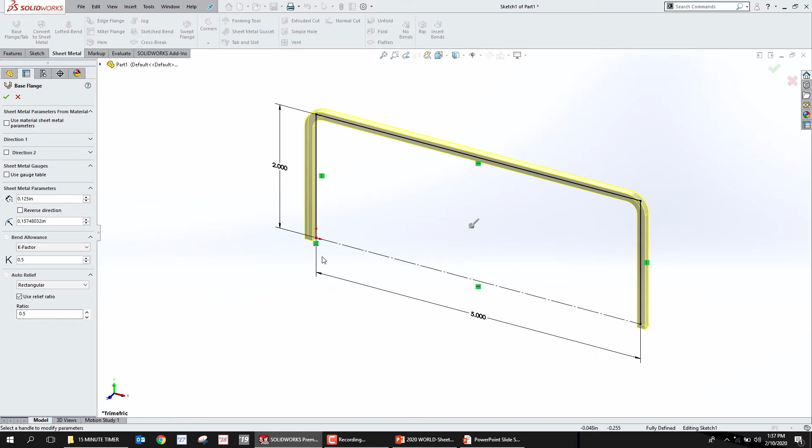Well, the miter flange is a sweep. So imagine we were going to take a sweep and create one that goes up here like this, around like this, and then down like this. So where is the sweep profile going to be? The sweep profile is going to be right here. Let's say we're going to create a sweep profile that looks like that. Can everybody see that in the back? You guys all see it?

So now we need to create a plane at that location, right? So what I'm going to do is select this edge for the miter flange. I'm going to start the miter flange command, and then click on this edge. Now, where I click it, if I click it at this region, or if I click it in this region, matters. I'm going to click it in this region.

So Solidworks automatically creates a new plane normal to that edge at the endpoint and puts me into sketch mode on that plane. Now I'm going to begin sketching and create the miter flange, which we'll talk about a little bit more when we get into the class about this idea of miter flange.

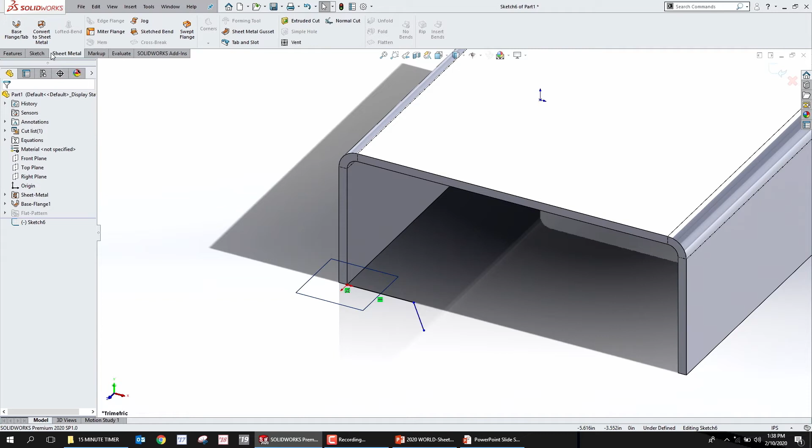This is like the pre-game warm-up, okay? If you guys are walking in, you haven't missed anything. Jose, what's up, how you doing? Welcome, haven't missed anything, we're just getting warmed up here.

But you can see here that I can go into miter flange and I can rip that miter flange around, right? It's pretty cool.

So this got me thinking when I first went through this process, does that work everywhere in SolidWorks? Like, for example, if I had a boss extrusion and I wanted to begin a new sketch normal to an edge at an endpoint. So let's say this boss extrusion has some draft on it, drafted out 6 degrees, and now I want to create a new plane normal to this edge at an endpoint.

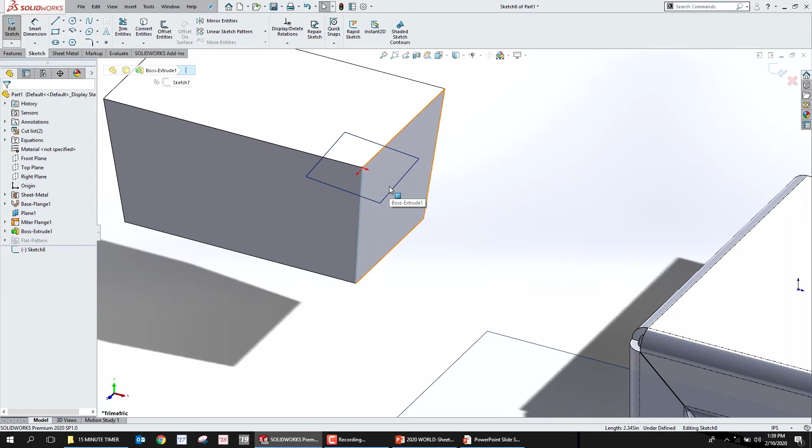I can click on this edge, go to Sketch, and click the Sketch command, and it actually creates a new plane normal to that edge at the endpoint. Kind of cool, right, that it happens like that when you're in solid mode and picking on a solid edge, but not actually that practical. It doesn't come up that often.

But what does come up quite often is the ability to do that off of a curve. So if you have a helix spiral, or a composite curve where you've joined multiple curves together, you can pick this curve here and then pick reference geometry plane, and it will create a new plane normal to that curve at the endpoint.

I don't know why I didn't do it, because I'm doing it live, right? Curve. Nope, reference geometry plane, and it'll do it. It will do it, yeah, normal to that endpoint.

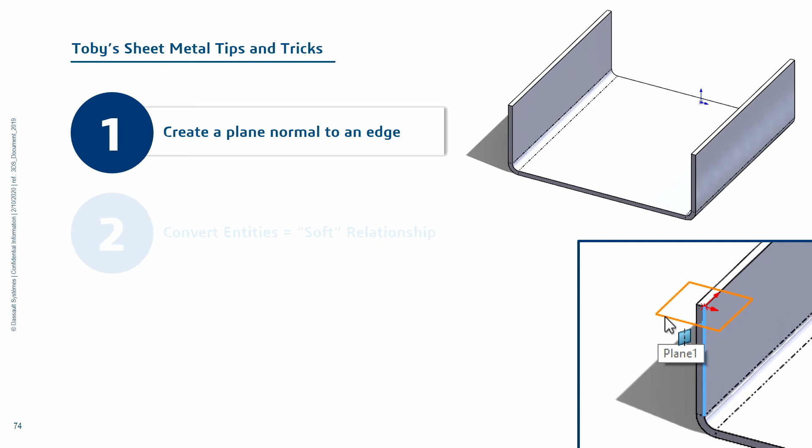So there are some other spots where you can use that, and this was kind of a quick session that I was going to originally include, and then I decided not to include it because I wasn't sure we were going to have enough time. But thanks to this awesome live crew, they gave us this extra little bit of time, so now we get to show you these extra little tips.

Now, although that one's kind of cool, but not that amazing, this one is totally amazing, and it's one that has helped me so much. I use this all the time whenever I am working in SolidWorks.

So convert entities creates a soft relationship. Show of hands, does anybody know what I mean by that? Maybe you've never heard that term, but do you know kind of what I mean by that? Nate, one other person back there? Okay, so like 3 people, now there's more hands going up. Everybody wants to join now that you did it. It just took one person.

So what this soft relationship idea means is that when you're working with the convert entities command... first of all, let's talk about the edge flange. I'm going to click edge flange here, sheet metal, edge flange. And what we get with the edge flange command is a new flange that exists along this entire edge, and we can get in here and edit this flange profile.

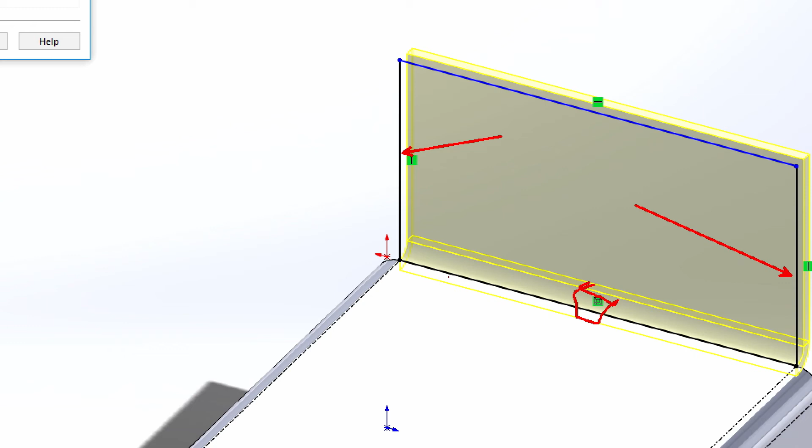It's a sketch, and you'll notice that this end of the sketch here is black, and this end of the sketch here is black. And that's because this relationship here is a convert entities relationship. So this lower edge of this rectangle has been converted off of the existing edge of the model.

But when we're in edge flange, we can just grab this line and move it over. How is that possible if it was black? If it's black, doesn't that mean it's constrained, right? And you shouldn't be able to just grab it and move it like that.

This is the only place I've seen in SolidWorks where this kind of sticky relationship, or soft relationship, exists. And it comes in the form of convert entities.

And you can demonstrate this, and see it really well, if you just make a couple of circles and extrude them. So you can see that I've got a circle here that's horizontal to the origin, a circle here that's horizontal to the origin, and I'm going to say extrude. Then I'm going to go to the front plane and pick this edge here, and say convert entities.

And I'll pick this edge here, and say convert entities as well. Just to make sure that sketch is a little easier to see, I'm going to go into sketch color and say I want that to be red.

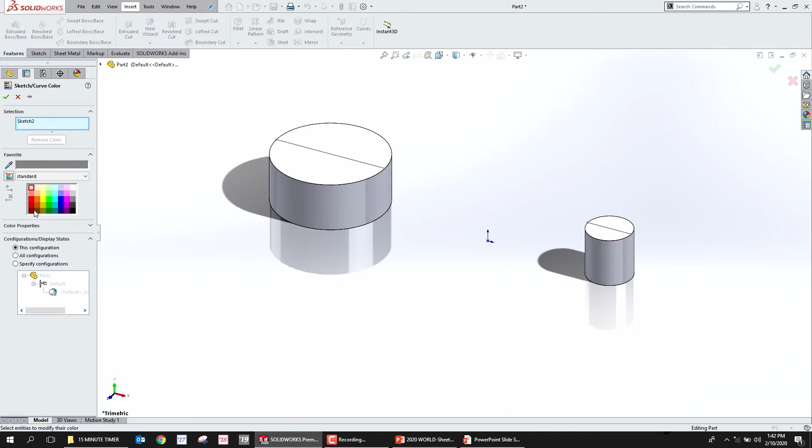So now I'm going to edit this sketch of the circles, and make this circle smaller and this circle larger. What's going to happen to those lines? They're going to move, as expected, right? But this is a convert entities command, so the endpoint of this line has this kind of soft relationship.

So I can actually grab this endpoint and just move it over, and now it's no longer going to stick to that convert relationship. Now, I've never seen this anywhere else in SolidWorks. I don't know if you guys have, feel free to yell out. But I've never seen this kind of thing, I call it like a sticky relationship or a soft relationship.

And I only learned about it because of sheet metal. I was going through sheet metal and I was like, hey, how come edge flange, how come the sketch is all black, it's fully constrained, but it can still be moved? You can still grab the edge flange and move it over, make it smaller, make it larger. And I learned that that kind of soft relationship exists all throughout convert entities.

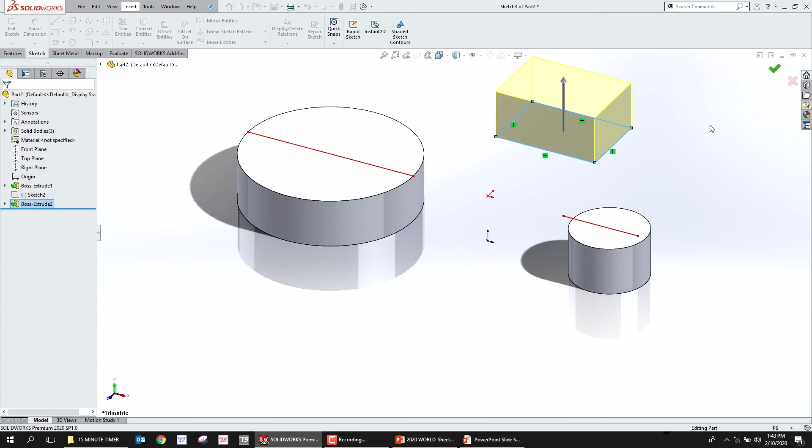So a practical application of that might be something like you are going to create a new rectangular boss extrusion, and then you just want to cut a notch into a corner of that. So you do sketch, convert entities, so now the whole thing is converted. And now I'm going to delete this convert entities relation because this is kind of collinear. So I'm going to delete that one, but the line is still black. But I can just take this now and move it over. And now the line's blue. And now I can just add a dimension, make that a little bit smaller.

So even though it shows up as black, sometimes you actually still can grab that geometry and move it. It's still predictable, which I'm sure you all remember from the song. Fully defined means that it is predictable, which is what we want. But it's got this kind of soft relationship, so you can turn it into underdefined.

Cool? Any questions? So far, so good? We're good? Pat? Right? All right. Everything sounds good, he's giving me the thumbs up. So I think we're good to go here.

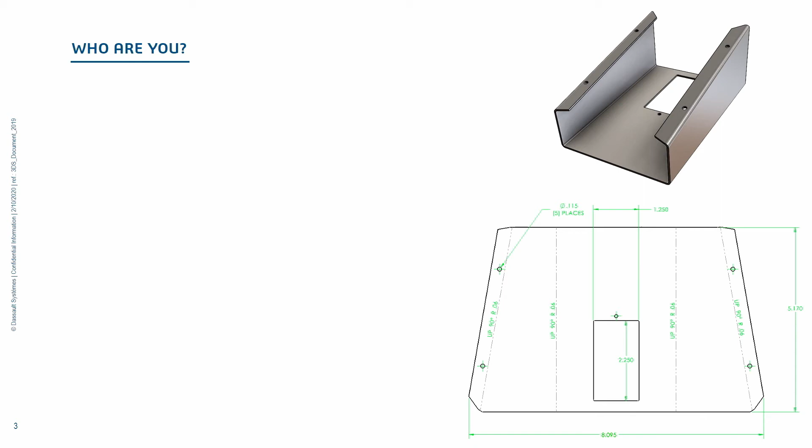So let me find out a little bit about who you are. So how many people in the room are newbies? Maybe you're just getting started with SolidWorks, maybe you're just getting started with sheet metal, maybe you really haven't done too much, feel a little lost. Okay, good, awesome. You guys are in the right place, welcome.

How many people would consider themselves kind of intermediates when it comes to sheet metal? So you may work with sheet metal for a few years, but you're trying to learn a little bit more of the ins and outs of what's going on in the world of sheet metal. Okay, great. So you guys are in the right spot as well.

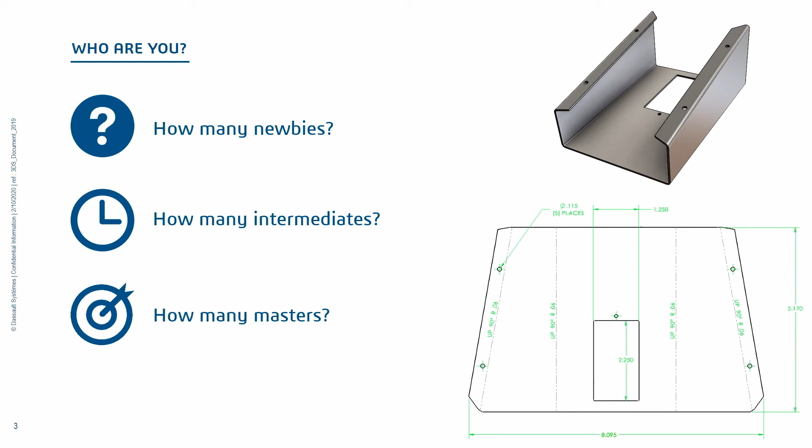And is anybody in here an expert, a sheet metal expert, certified sheet metal expert? I don't know if there actually is an expert certification, but okay, good. A few of you are in here. So you guys probably aren't going to learn too much about sheet metal, but I'm pretty sure you're going to learn about some other things. Like maybe you just learned about convert entities being a soft relationship. Maybe you didn't know that before.

So my name is Toby. I'm a certified SolidWorks expert. I started doing tech support and training in 2001. I've taught a lot of sheet metal classes. I also work with sheet metal in the field for a few years, so I have a little bit of practical experience that I draw upon as well. I also have a ton of content posted on YouTube, so if you want to check me out on social, that's a good place to find me.

You can just do a search for Toby SolidWorks. You'll probably find my content. I've got a lot of videos up there. And I also just this year created a new kind of handle online, and you'll find me on YouTube and Reddit as Too Tall Toby. Too Tall Toby.

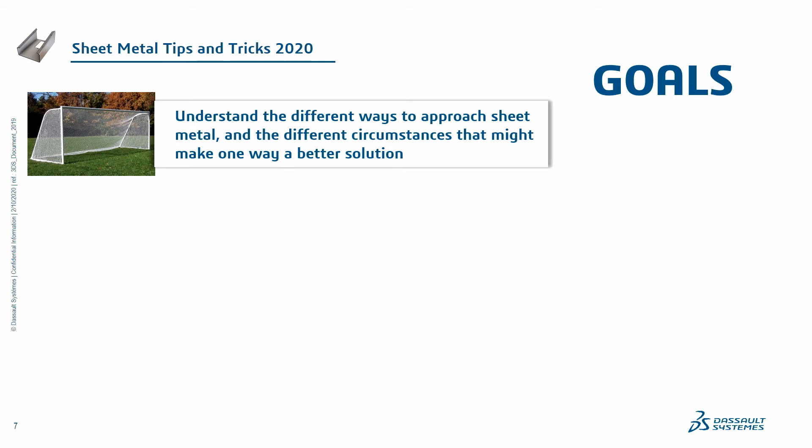We only have an hour together, so it's going to go by pretty quick, but I'm sure you're going to get a lot out of it. What I hope you get out of it is that at the end, you understand the different ways to approach sheet metal and the different circumstances that might make one way a better solution. If there are 3 different ways to get started with sheet metal, which one should I use? Hopefully by the end of this presentation, you'll be able to answer that question. I also hope you're going to be able to understand the best way to create a flat pattern. It might seem like a straightforward process, but I think you may be a little surprised. And I hope you learn at least one additional tip or trick by the end of the presentation.

Does that sound good to everybody? Everybody sound like they're in the right place? Okay, I'm seeing some heads nodding. Awesome. All right, thank you.

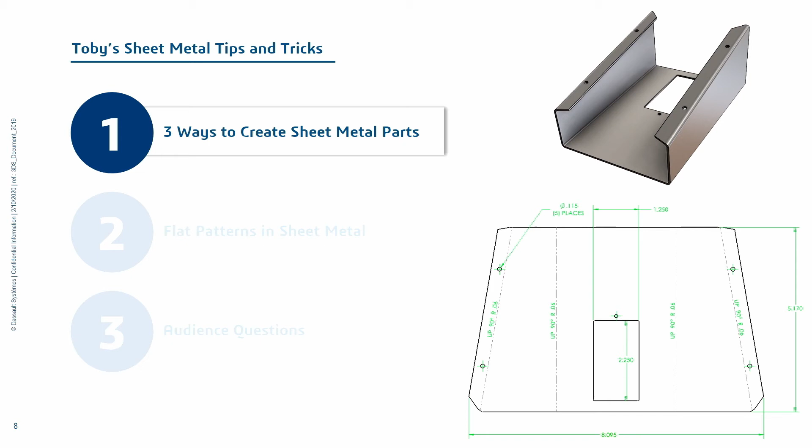It's a community. Let's get into the first section called the 3 different methods of getting started with sheet metal. We're going to start with the first method, insert bends. This is a method that actually came out a long time ago, almost immediately after SolidWorks was released. SolidWorks came out in 1995, and this functionality was added around 97, 98.

So this is a very old bit of functionality, not used too often these days, but there are some spots where it can be very useful. The way insert bends works is that you would actually start out with a solid model. This is how we used to have to model sheet metal. We would go through, create extrusions and cuts, and ensure that all our walls were the same thickness—what we call uniform wall thickness. If we did not achieve that, our models wouldn't be able to be flattened. After creating that model, we would launch a command called insert bends.

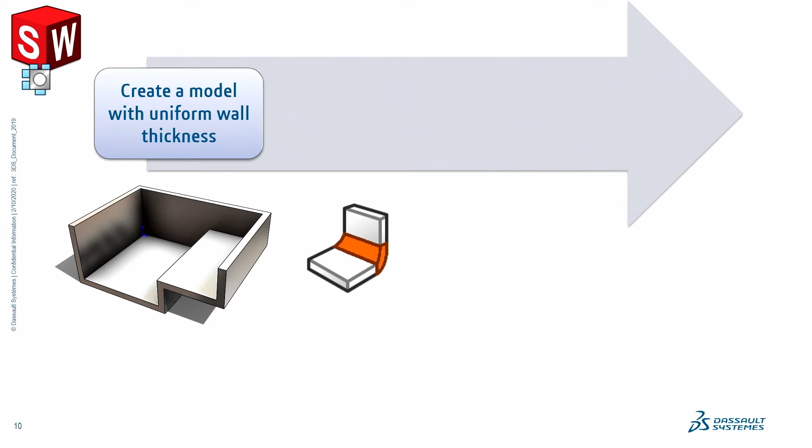It actually came from the pull-down menus back then, so you'd go into insert bends. You would then be able to declare what your fixed face is, along with a couple of other options. And then finally, you would have your completed sheet metal design, and you'd be able to flatten it.

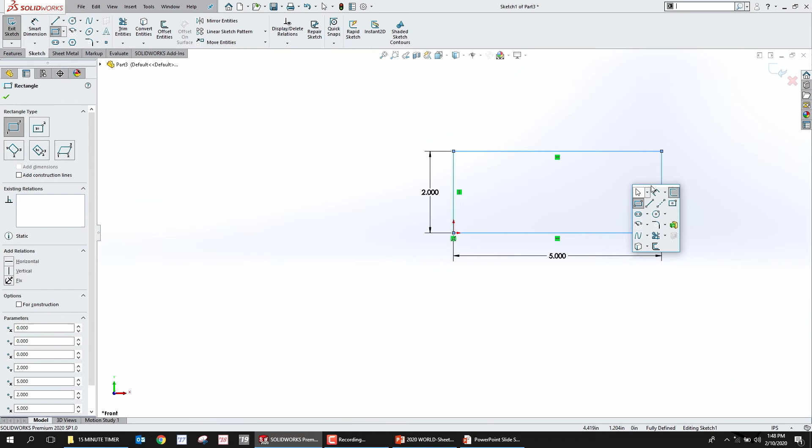So let's take a look at what this workflow looks like in the SolidWorks software. We're going to start a new model, in inches. We'll go to the front plane and begin a sketch. Make a rectangle—2 inches high by 5 inches wide—and another rectangle, 0.75 by 2 inches, dragged down to the corner. Then I'm going to use the boss extrude command, pick this contour, and bring that out to, say, 3 inches.

Now I'm going to go to the shell command, and I want to shell this thing to a wall thickness. So what do you guys think this wall thickness should be? Let's make it 90 thou. Now we're doing this with a shell command, not with a traditional sheet metal command.

So now we have accomplished the first step. We've worked with our traditional solid modeling tools and created a solid model with uniform wall thickness. We're ready to go to the sheet metal commands.

So we turn on our tab for sheet metal, and we go to the command insert bends. It's an old command, it's been in the software for a long time, insert bends. And SolidWorks says, which face do you want to be fixed?

This is kind of a marginal decision. It doesn't really matter, but sometimes in downstream commands it makes things a little bit more intuitive. For example, I probably wouldn't pick this face. I would probably pick this face or maybe this underside face here as my fixed face. It basically just means that face is going to stay still while everything else unfolds.

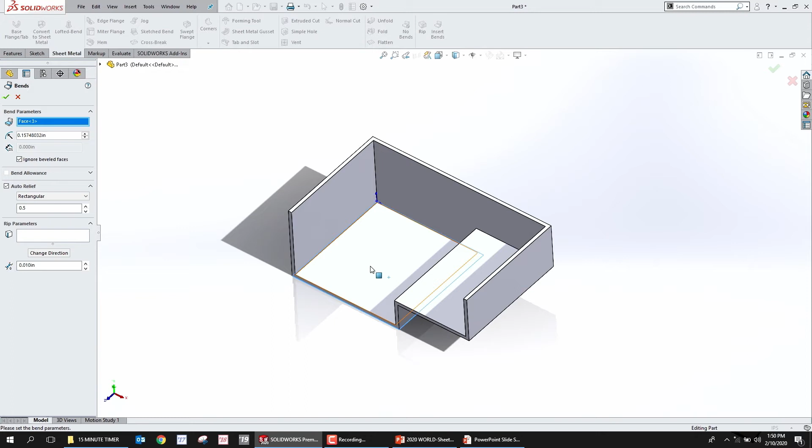But that second statement, while everything else unfolds, is going to be problematic because if we examine this region back here, this back panel, it's not going to be able to unfold because of how this edge is fused together here. So I have to tell the software that that edge should no longer be fused together. And the same thing with this edge here, and this edge across here, and this edge up here. And then this back panel is going to be able to kind of lay down like so.

So I'm going to tell the software that that is the scenario by utilizing what's called the rip parameters command. With the rip parameters, we're able to say this edge is supposed to be ripped. So I'm going to just open up that edge. This edge is going to be opened up, this edge is going to be opened up, and this edge is going to be opened up.

The final input that we need to establish when we're working with sheet metal is what is the default bend radius? What's going to happen in these corners when I go to bend the sheet metal? So first we declare what the wall thickness is - we actually did that earlier in the model. Now we declare what the default bend radius is.

Now if the wall thickness is 0.090, what should the default bend radius be? Or for all my sheet metal homies in the room, what should it not be? What do you think? Right, it should not be less than the wall thickness.

So if you're brand new to sheet metal, this is a fundamental rule of sheet metal: you don't want to make the bend radius less than the wall thickness. If you do, you're going to end up having problems. You may break the parts, you might break the tooling, you're going to have a problem.

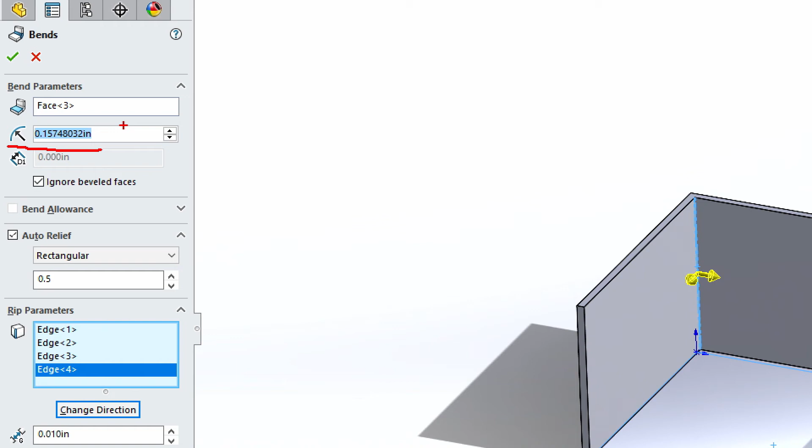So we don't want the inside bend radius to be less than 0.090. And maybe we don't even want it to be 0.090, or maybe we can't - determining what that value is, there's other things that factor in there. A lot of times it's based on what tooling you have in-house. So we're going to say in-house we have tooling to bend this at 1/8 of an inch, so I'll make that 0.125, and we'll hit the green check mark.

And now we've got a sheet metal design that we can flatten. This was how we did it in the old days. If we wanted to create additional tabs, we would roll the tree back. We would create another feature here, we would create this feature again at 90 thou.

So we would go to extrude and make that 0.090. And then when we roll forward, we would see that that becomes part of the sheet metal design. This can all be flattened. You can see we can click the flatten command and it all becomes flattened.

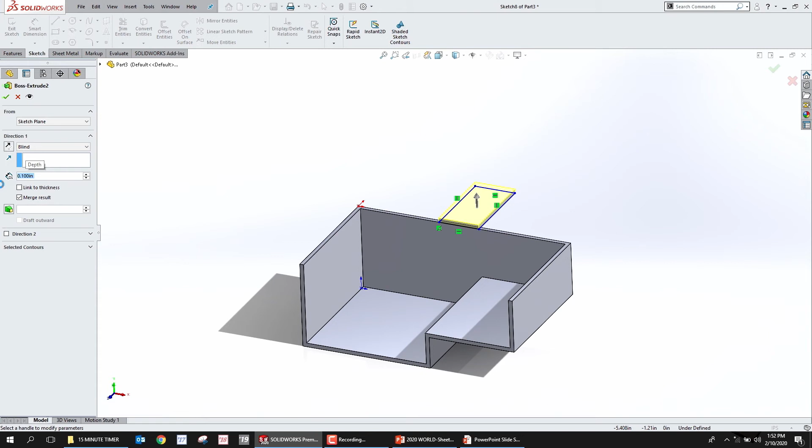And if for some reason we missed that number - let's say we make that 0.1 instead of 0.090 - we're going to have problems. So you can see here, we got an error, and we can see over here that that flange did not complete successfully. So you must have uniform wall thickness if you're going to use this command.

The other thing that's important to know about sheet metal, and this exists all throughout sheet metal, is that the length of all of the edges combined will be different from the length in the flat. So in SolidWorks, maybe you knew this, hopefully you knew this. If you didn't, now you do.

If you click on something, you can often look down here and see what the measurement of that something is. Anybody not know about that? Show of hands. A couple people? I see you guys, okay cool, good. This is really helpful, it saves you going into the measure command over and over again.

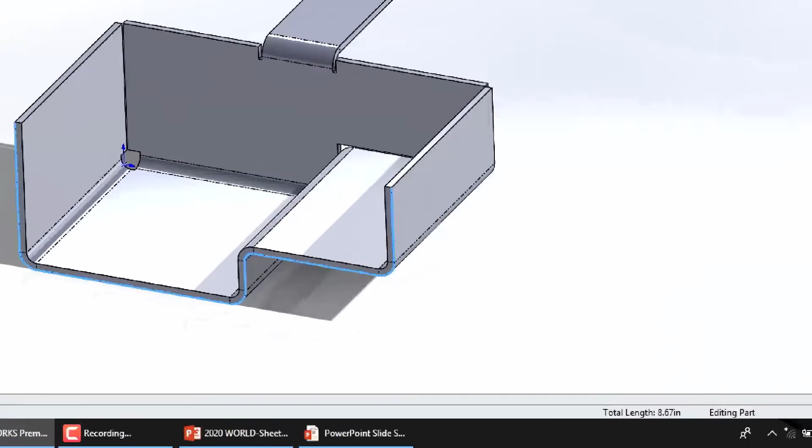We can also do that with multiple selections. I can select tangency here, and I can see that the length of this edge is about 8.4, 8.387. And if I do the same thing on this edge with right mouse button select tangency, we can see the length is about 8.67. So 8.4, 8.67. But if I go into a flat pattern, the length of this edge is not 8.4 or 8.67, but instead is 8.528.

This is a function of what we call in sheet metal bend deformation or material deformation. It means that when you're doing a bend in sheet metal, this region is compressing slightly, and this region is expanding. So your flat pattern length is not going to be the same as the sum of all the edges in the form state.

This might not sound like a big deal, but our goal is to have a set of measurements here. We want this thing to be 5 inches long total, 2 inches high total. If we didn't do that calculation correctly, we wouldn't establish that goal, we'd make bad parts. So when this came out in 1997, 1998, it was huge - it was so useful for SolidWorks users, and it saved us so much time.

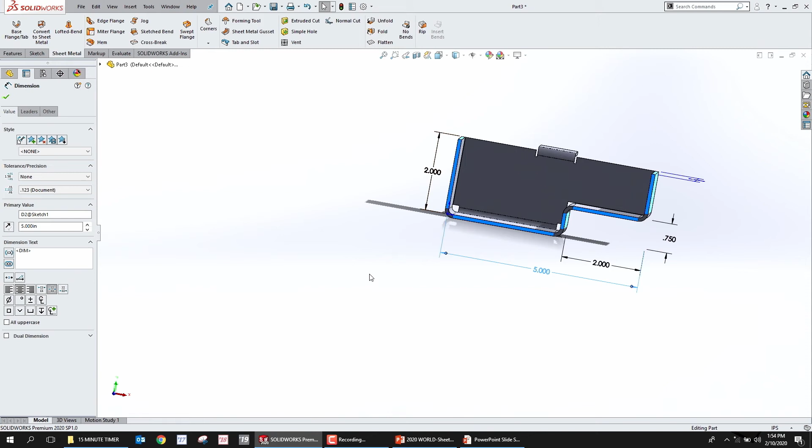It's also important to know that's another fundamental of sheet metal for those of you in the room that are maybe a little newer. The other thing I want to mention about this older command - why am I telling you about an older command - is that there's still a really good use for it, and that is when you're working with imported models. We talked a moment ago about bend deformation: this length won't be the same as the flat length.

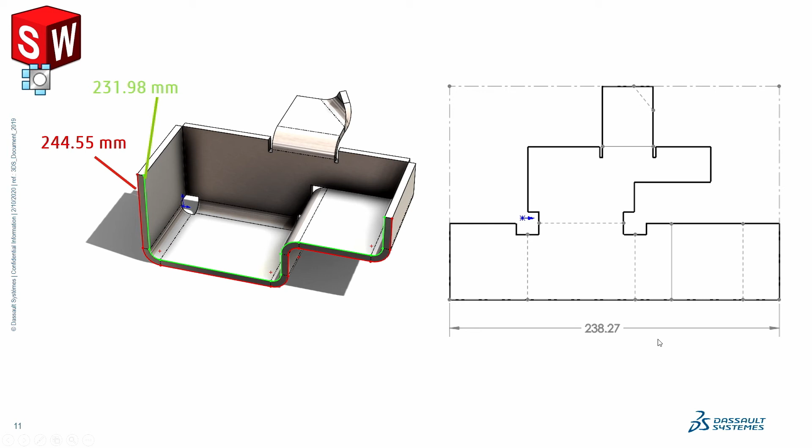Let's talk about imported geometry, and shout out to Jacob Halassa - is Jacob in the room? Well, shout out to Jacob for posting this file for me. It's a table, a really simple table with a couple of shelves. One shelf was created with sharp edges, one with round edges. But regardless of whether you're working with an import that's already sharpened, or one that's rounded, you still have the ability to open this in SolidWorks and turn it into sheet metal. This is a spot where you can still use it to this day, and you still may find yourself using it.

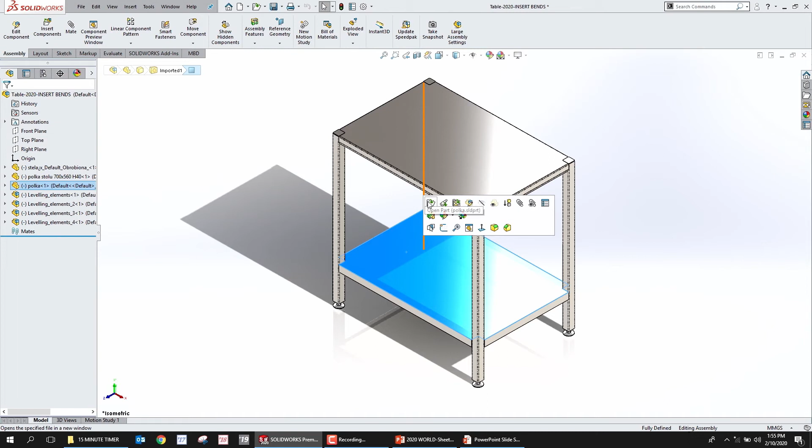You can see I can open up this model, which is a STEP file. It has no history tree, it's not a native SolidWorks file, it's an import. I can choose this face, choose insert bends, and choose what I want the bend radius to be. Now I need to figure out what the wall thickness is, so I'll pick this edge and see that it's 3 millimeters. We'll go insert bends, let's make that 4 millimeters. And now we have a sheet metal part that we can flatten.

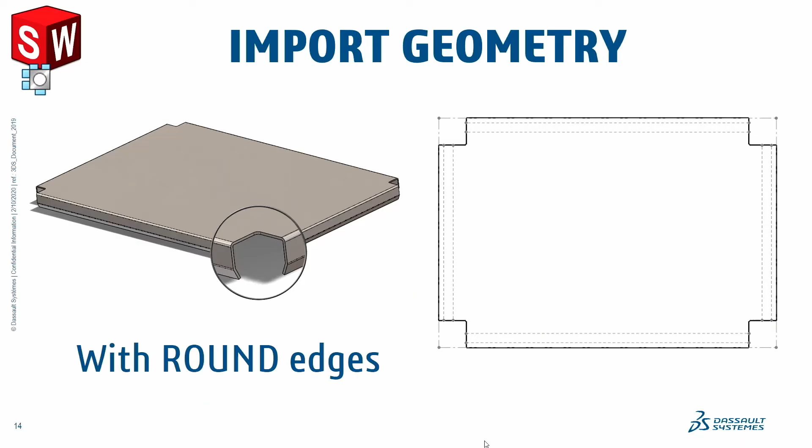Pretty cool? All right, cool. So for those of you taking notes, this is what my notes would look like: the insert bends command is more of an old school tool, circa 1997, 1998. It must have uniform wall thickness. The flat pattern length is different from the formed length, but it can still be very useful, especially when you're working with imported models.

Any questions so far? No questions, all right - that's what we call 100% comprehension. That means you guys are amazing students.

All right, let's move on now and talk about the next section of our presentation, the second method of the 3 most common methods of creating sheet metal: the base flange and friends command. This method is a little different. In the previous example, we would start out with a completed model, all uniform wall thickness, and then go in and insert bends. But with this method, what we do is we actually start out with a thin feature sketch.

This is the more common way of doing sheet metal today, added in 2001. If somebody gave me a print or a hand sketch and said, hey, can you make this a bracket in SolidWorks, this is how I would do it - I would do it with base flange and friends. Definitely the most popular of the methods, but not the coolest. You might be surprised when I show you the third method, which I think is the coolest.

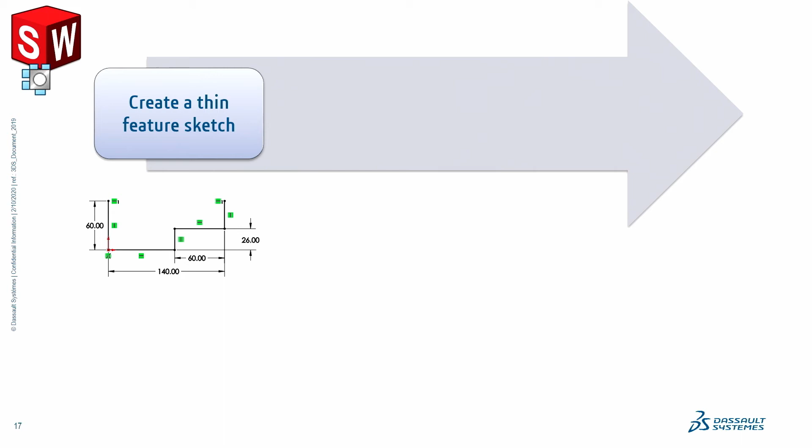After you're done creating that thin feature sketch, you're going to go into the base flange tab command, and you're going to extrude this as a thin feature. The UI looks very similar to a thin feature command, but during that extrusion you're actually going to specify the wall thickness and the default bend radius. Then at the end, you're going to be able to create all these really cool additional features.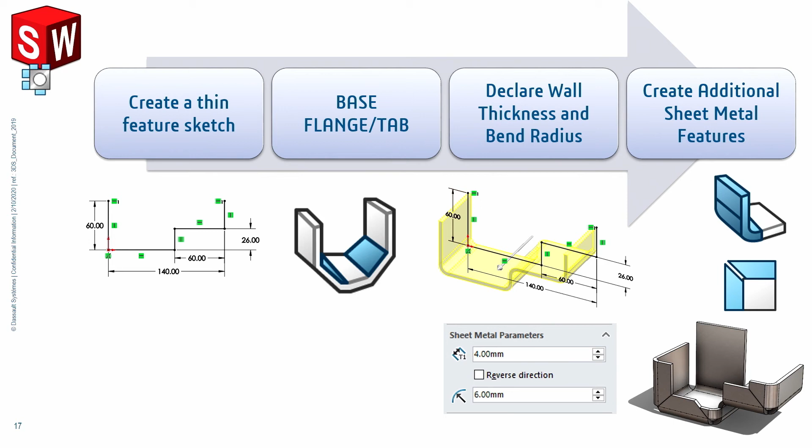Let's take a look at a quick example of the insert base flange command. We'll use the same technique we used last time. We'll start out on the front plane, begin a sketch, jump into the rectangle command. Let's make this 2 inches by 5 inches. Let's make another rectangle, and we'll make this one 0.75 by 2.

We'll jump into the trim command and trim this up. The sketch is underdefined, but that doesn't matter, right? Just leave it underdefined. No, never leave it underdefined. So we'll right mouse button, fully define the sketch, and finish that off with some dimensions. Then we're going to take this top line here and turn it into construction.

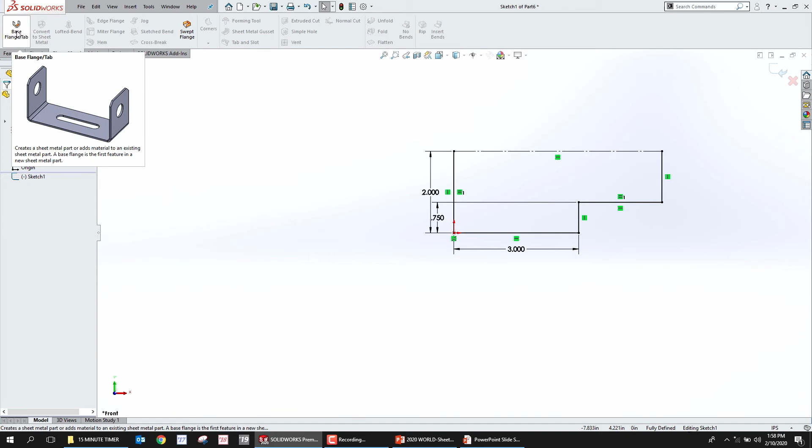Now we're going to go to the sheet metal tool, base flange tab. Once I go into the sheet metal base flange tab command, you can see that I'm immediately being asked to do essentially a thin feature extrusion. But the sheet metal features are already there, ready to go. This is the most popular, the most common way of doing sheet metal today.

You can see here that I've got a field for what the default wall thickness is and a reverse direction. Basically what that reverse direction is saying is, what are you using this for? Is this supposed to be 2 inches from the floor to the top of the bracket? Or is this a bracket that's maybe holding a PC board that's 2 inches tall? Because if that's the case, this isn't going to work the way that it is now. So I would do a reverse direction so that it can enclose that geometry.

I'm going to make this wall thickness 0.090, and just like we talked about before, I'm going to say that I want this to be 0.125.

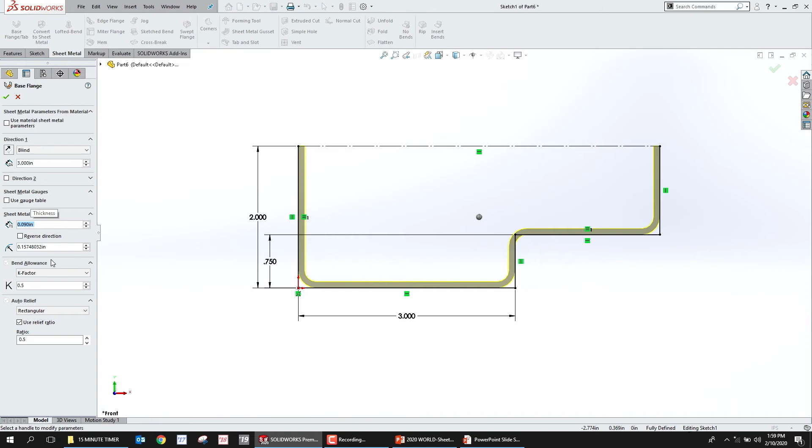Now, sometimes people come at you with a little curveball, right? You go to work at a new company, and you say, hey, what should the wall thickness be for that? And the guy says, make it 12 gauge. And then you're like, oh, do I just type that in? Or how do I make it 12 gauge? I don't know what that's supposed to be. So you have to go to some kind of a table and look it up.

Well, what we have in SolidWorks is a really handy tool for that called a sheet metal gauge table. So this is a sample sheet metal gauge table just right out of the box. You can see that this is using the 3D Experience platform. No, I'm just kidding. This is Excel. So this is an Excel spreadsheet here.

In this Excel spreadsheet, you create your own columns, so you can modify these columns to make them whatever you want. You make the gauge and the thickness match up appropriately for the type of material that you're using, and set the units to be what you want. Then you can set these to be kind of dummy-proofed, so someone doesn't give the sheet metal a radius that's too small for the material. You can also set them to only be available tooling that you have in-house, so that way you're guaranteed, or at least it's a little more likely, that you're going to be able to build this in-house.

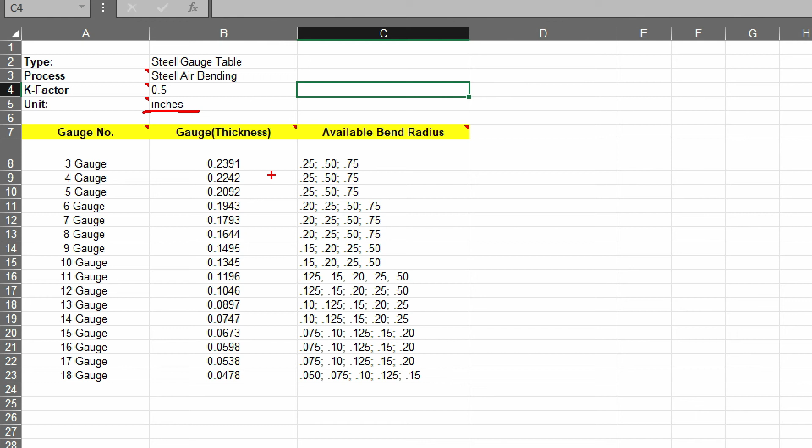Never guaranteed, right? So what we're going to do here is choose this gauge table that we're looking at, and choose to make this thing out of 12 gauge. We can see 12 gauge down here, and we'll see how that responds in the SolidWorks software.

So when we go to do an extrusion of a base flange tab, we have this checkmark here that says Use Gauge Table. I can go into this pull-down and select this gauge table, and now I've got pull-down menus. I can say I want that to be 12 gauge, so the wall thickness, I don't even choose it, I just pick it right from that pull-down menu.

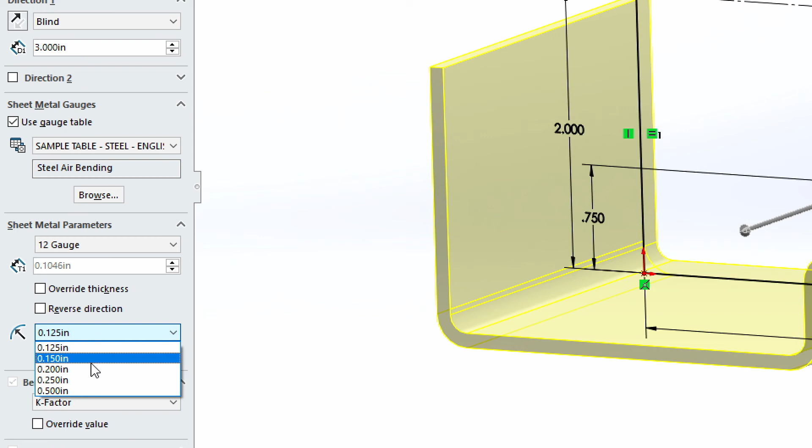It's a simple Excel spreadsheet. You can just make a copy of it and modify it so it works for your material or your operation. Then here you can pull down this menu and choose the available bend radii. Pretty cool, right?

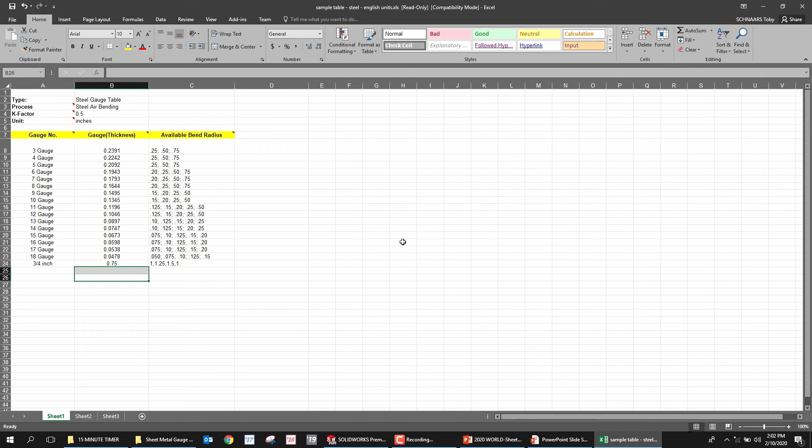I think it's worth mentioning that along that same note, when it comes to figuring out how much deformation is taking place, I mentioned earlier that the length of the model in the flat is not going to be the sum of all the edges and arcs. It's going to be different because of bend deformation.

That calculation is not necessarily easy to lock down. It's going to be different depending on what type of material you're using, what the bend radius is, what the angle of the bend is, what the material thickness is. These things all factor into that calculation. So for today, I want you to know that it is a thing. It does exist, and we have some great tools to help you determine that calculation and get it right.

Out of the box, you use a really basic tool called K-factor, which is just a ratio. A lot of times if you go a third of the way into the material, so a K-factor of 0.3333, it'll get you pretty close. But there are scenarios and companies where that number really needs to be accurate. And when you're dealing with larger, thicker materials, that calculation is going to be different.

Grain direction, another great point. That can also affect bend deformation. There's a section in drawings where SolidWorks addresses grain direction, and that's pretty much the only place we really talk about it. Getting into the weeds here, you'd probably have to do that as multi-body and then combine them some way at the end. Yeah, it's another good point. So a lot of things can factor into this bend deformation, and it also depends on how accurate you need to be.

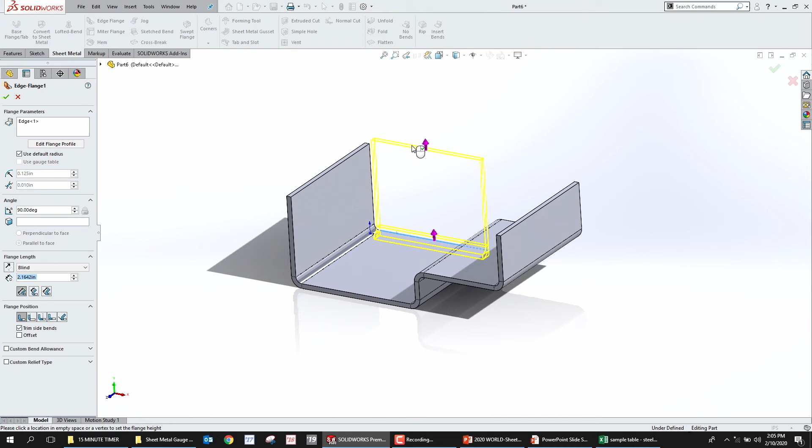Now I'm going to create another feature, called edge flange. When I create the edge flange here, you'll see that it lands in between that last feature, flat pattern, and the first feature here, sheet metal.

So when you do base flange, you kind of sandwich all your features in between these other features. If I was to come in here and do a hem, so I'm going to take this edge here and perform a hem command, so nobody cuts themselves on that. There we go. You can see that that also lands here in the tree above flat pattern. So when you use the base flange and friends, everything that you add is going to be added in between that start and that finish feature.

What that last feature is actually doing is unfolding all of these bends, flattening each of them one by one. If we unsuppress that last feature, it takes us into the flat pattern.

And if we wanted to, one by one here, we could suppress these. If we were maybe designing a progressive die, something like that, we could create configurations at each state and then use those different configurations to actually design the progressive die around each of those bends.

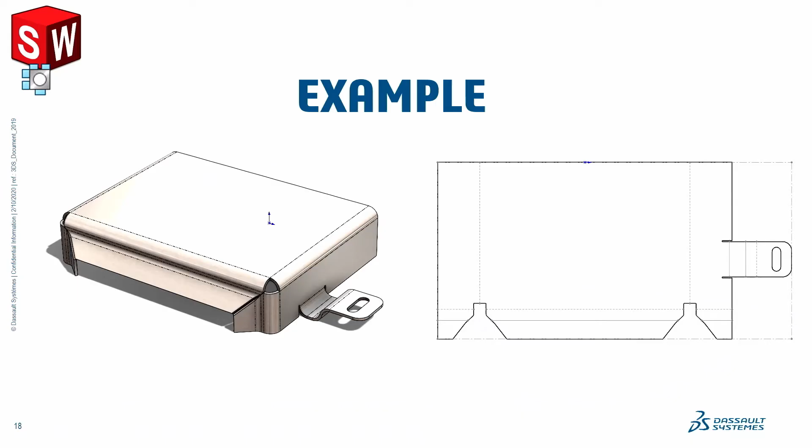Although it's most popular, that's all I really have to say about that one for now. There's lots of cool commands that you can use on top of base flange, like miter flange, jog, hem, edge flange. Lots of really cool tools that you can use in coordination with the base flange and friends.

If I was taking notes, this is probably what I would put: this is a command that you would use when you're starting new parts. If somebody gives you a napkin sketch, somebody gives you a 2D print, this is probably the command that I would use to turn that into sheet metal.

For me, a lot of times it's just like I'm looking at something and I'm just going to draw it up in sheet metal. This is what I use.

Good? Good? Good. All right.

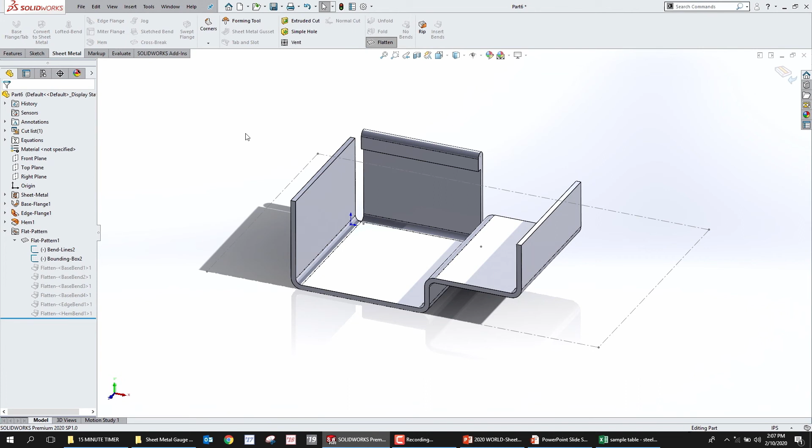If I open up this model, which has a 2D sketch that exists at a slight angle, you can see this angle here, and it's supposed to have a flange that comes up off of it and that flares out. So I'm going to select that 2D sketch and choose base flange tab. Now, because it's a closed sketch, instead of extruding as a thin feature, it basically just gives me a platform. So there it is, basic platform there.

Now I'm going to select the edge of that geometry, and I'm going to choose to extend an edge flange. If I look at this thing from a side view, you can see that I can adjust the angle of this edge flange. There are some little tricks that we can use to dictate what that angle is, but unfortunately, one of those tricks is not to select my sketch layout.

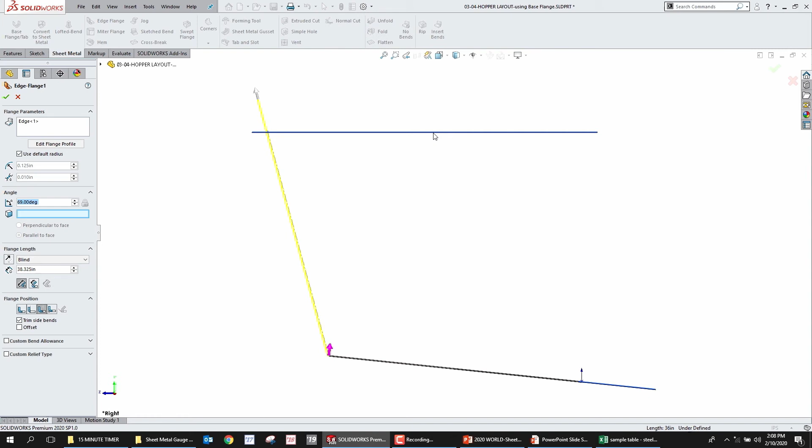So I have to come up with some kind of workaround. Similarly, getting the height of all my flanges to be the same as this top plane here, there's not necessarily an automated way to do that. I probably, honestly, would just create them all and then just do a cut extrude using normal cut and cut them off at the top, but there's not really a more elegant way to do that.

And then I'm going to do my edge flange here, and I'm going to get rid of this vertical relationship and have this thing flare out a few degrees. All right, not too bad for that first one.

Let's create another edge flange coming off of here. So we go edge flange, we bring this guy up, and we have the same kind of challenges. We have to adjust the angle of this flange to match up with the other flange. And again, there are some tools, like maybe make it parallel to a face. Maybe I could try to do that and pick this face, but the problem is if we look at this from a front view, it's not really parallel or perpendicular because it's going off at a compound angle.

Okay, and the challenges continue, and I'm sure you could imagine that as we continue around this model, it's just going to get more and more challenging.

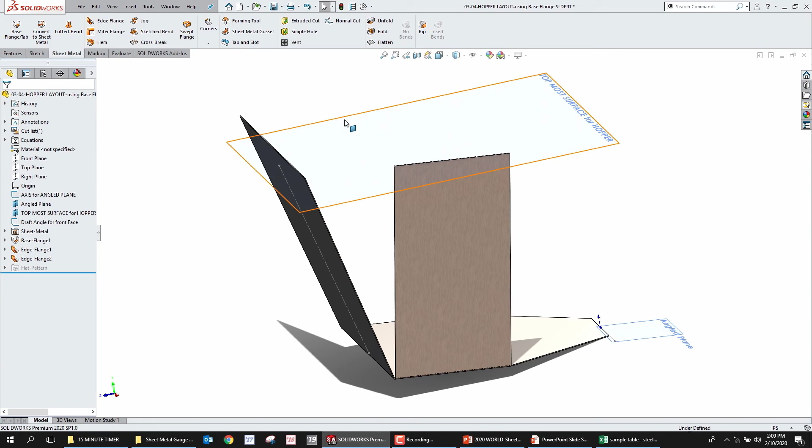With convert to sheet metal, we're able to address those challenges in a really elegant way. So what I've got here is just a boss extrusion, a single sketch extruded, no draft on that sketch. This model does flare out, so I am going to put some draft on this thing.

So I'll go to my draft command, and I'll apply 6 degrees of draft on this front face here. I'll apply 8 degrees of draft on these 1, 2, 3, 4 side faces. And I'll say there should be 10 degrees of draft on this final face on the back here.

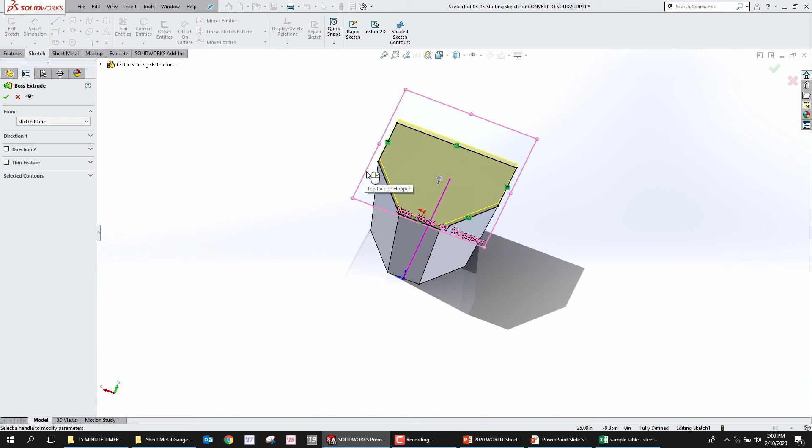Okay, I think that looks pretty good. Finally, what I'm going to do is just make a sketch here, converting those faces at the top, and bring that up to surface to come up to this plane that I've created representing the top of my model. And then the bottom of this thing also has an angle to it, so I'm going to pick this open 2D sketch and choose cut extrude, and say through all in both directions.

And when you do that with an open sketch, it's the same as doing a cut with surface. So it just cuts the bottom of that model off. Looking at this thing from a side view, it looks like this - it's flared out in all directions. Let's talk about convert to sheet metal and how we can create this model, this vertical conveyor feeder, using convert to sheet metal.

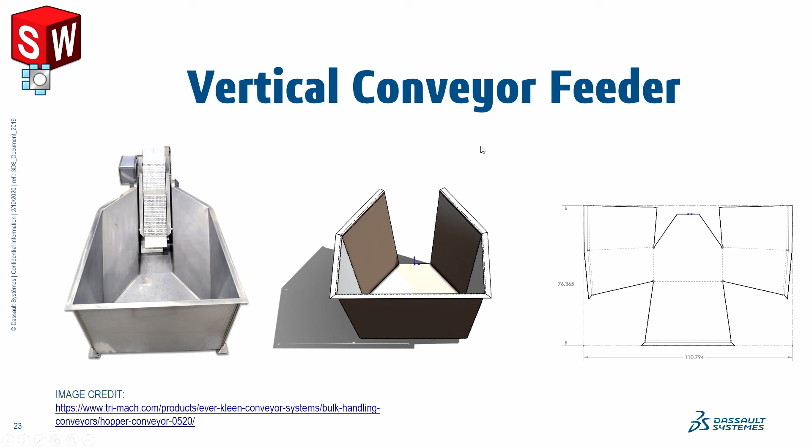In less than 5 minutes. Think we can do it? Yeah, we can do it, for sure.

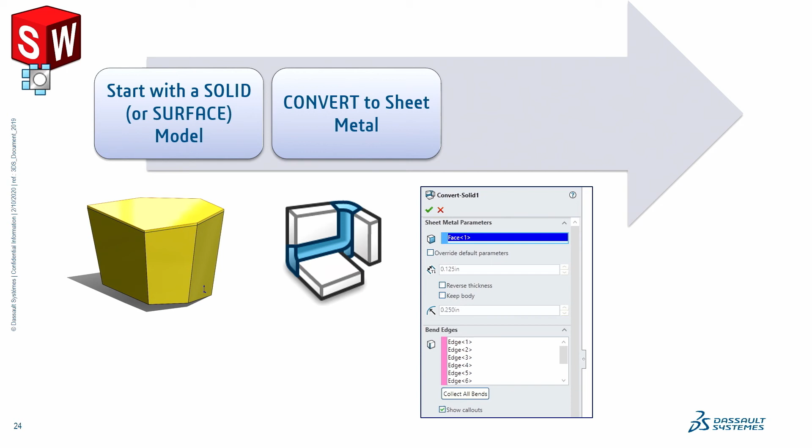We're going to input the wall thickness. We're going to input the bend radius. And this is going to leave us with a sheet metal design that we can then create additional features on, like base flanges, hems, edges, miters, all the cool sheet metal tools that we have.

So here's what this design is going to look like, or what this process is going to look like. We go to the command, convert to sheet metal. It's here on the sheet metal toolbar. Convert to sheet metal.

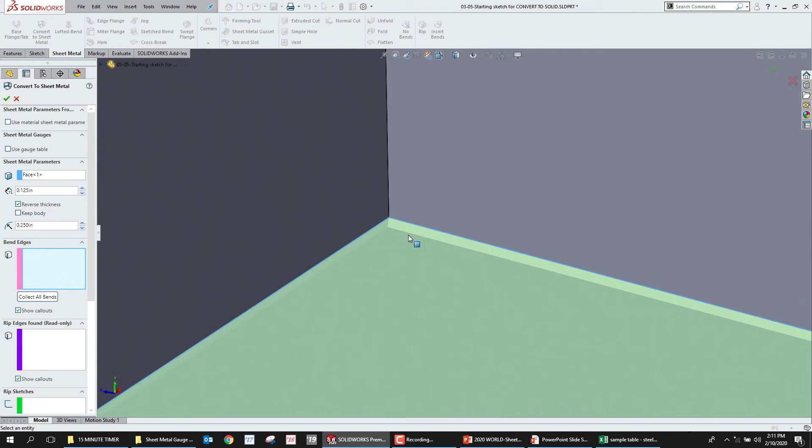So we're going to click on that command, and then go to this lower face here, and SolidWorks is going to immediately apply a wall thickness to that lower face. I'm zooming way in here - it's kind of hard to see, but it has turned that lower face into a sheet metal design.

Now, I'm going to say I want the wall thickness to be 0.125, the bend radius to be 0.25, and I'm going to pick this edge right here. And SolidWorks is going to eliminate the rest of the model and just leave me with that foundational face and then the edge that I selected for a bend in a sheet metal format.

So with just a few additional clicks in the definition of that feature, I'm going to say, from the foundation, I also want to bend up this side and bend up this side. See what that looks like. Well, this thing's looking pretty good in just a couple of clicks, right?

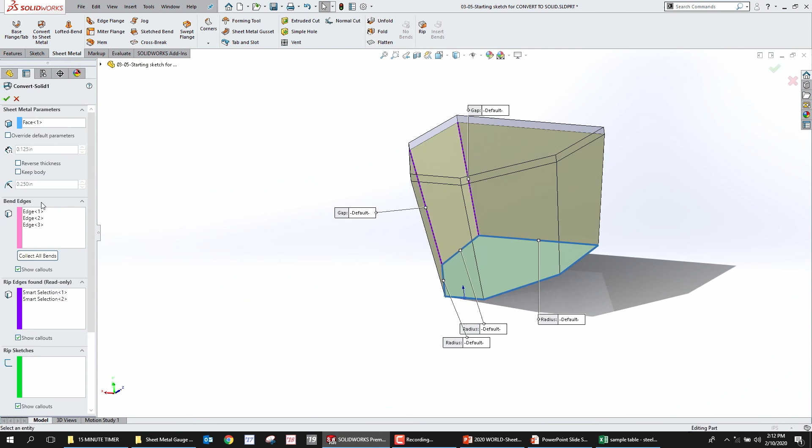I'm going to say that I want to bend up this side over here, bend up this side, and then at the top, I want to bend up to that little straight region, bend up to that little straight region, that little straight region, that little straight region, and finally up to here. I never told SolidWorks to bend this edge here, so that remaining non-connected geometry is just eliminated.

Isn't that so cool? And now, of course, from here, we can go to the edge flange command. Let's say we want to make an edge flange off of this edge here. We want it to be 2 inches, and we can actually pick multiple edges here.

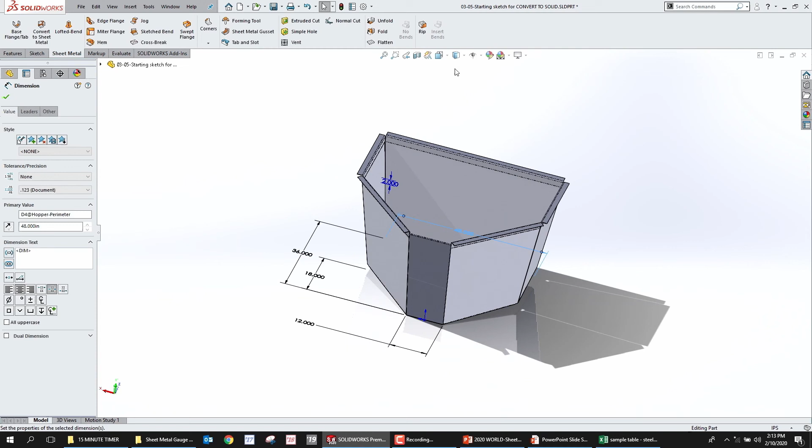Pretty awesome, right? What about changes? We have to make changes. That's always the thing with SolidWorks—when you're working with it and need to make changes, that's going to happen, right? That's our strength. So let's say we change this to 48, no problem. The whole thing just updates. Our sheet metal flat pattern updates. Everything's fine. It's just a solid.

So cool. What do you guys think? Good? Yeah? Cool? Yeah, cool. Let's clap for this feature and the R&D team that made it.

Yeah, it is awesome, man. I've used it so many times to get me out of jams, and it's so easy to use. When you've got complex geometry coming together, it's so easy to use. But it actually gets even better than that, because this can be used for imported geometry when you have non-uniform wall thickness, because the command insert bends needs everything to be uniform. But this command, convert to sheet metal, doesn't care about that.

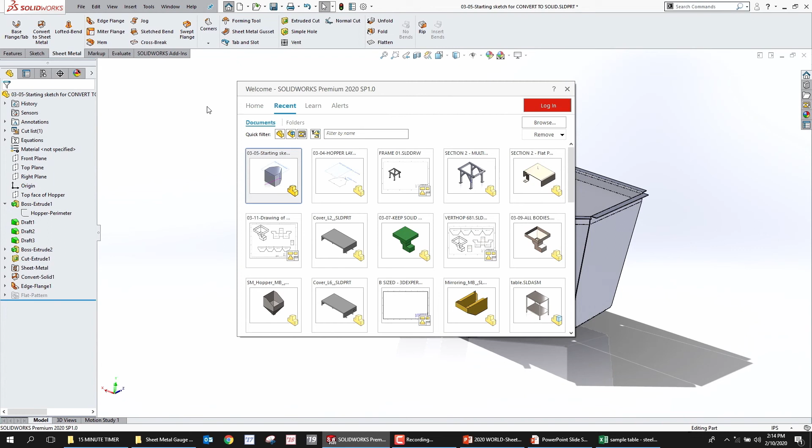If I go in here, I'm going to open up another step file, and this one has non-uniform wall thickness. The guy who was making this didn't really think about it when they were exporting it—they didn't realize these were different. So if I use the traditional insert bends, this is going to error. Hey, there's the error in the tree there. And we lose that flange with non-uniform wall thickness.

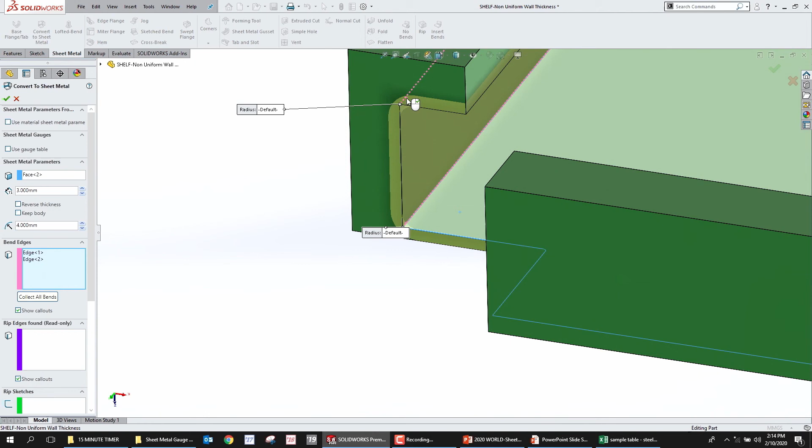But if I do convert to sheet metal, I click on this face, and SolidWorks says, well, what do you want that face to be? Do you want it to be 4 millimeters? Do you want it to be 1 millimeter? It doesn't care what the existing wall thickness is—it's creating that wall thickness based on the face itself. So if I make that 3, and then say I want this to be 4 millimeters, and I pick this edge here, and this edge here, SolidWorks is able to take that imported geometry from your customer and turn it into something you can flatten.

Convert to sheet metal also lets you create a multi-body sheet metal design. So let's say we had a design like this vertical conveyor feeder, this hopper, and we want to turn this into sheet metal. How do we do it?

Start with base flange tab? Nope. We're going to start with a solid, and turn that solid into sheet metal by using this option for keep body. Remember when I showed you that first example of the hopper, the first thing I did was pick the bottom face and the first bend, then hit the check mark, and the rest of the solid body was discarded. Well, in this example, I'm going to keep that solid body, and keep building off of it to create multiple bodies in one part.

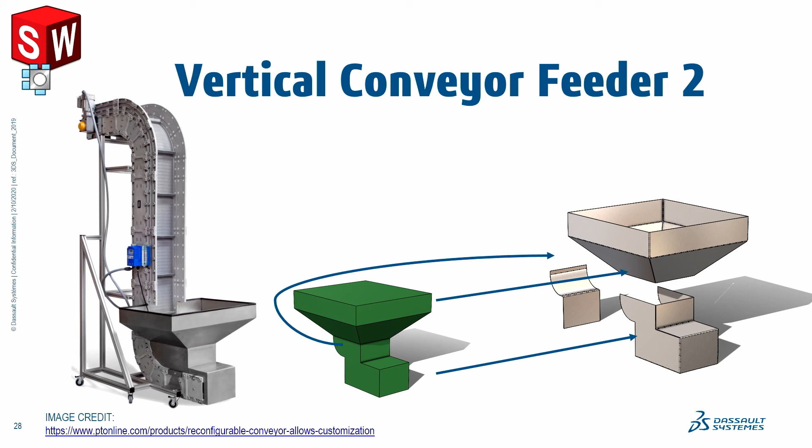So here's our solid, just regular old plain Jane features here. Convert to sheet metal—I want this to be my foundation. I want this edge to be bent, this edge to be bent, this edge to be bent, and this edge to be bent. And when I choose that and hit the green check mark—oh wait, I misclicked, sorry. Let me try it again, foundation—I clicked through and picked that back edge, that's what happened. Stupid, God. All right, here we go.

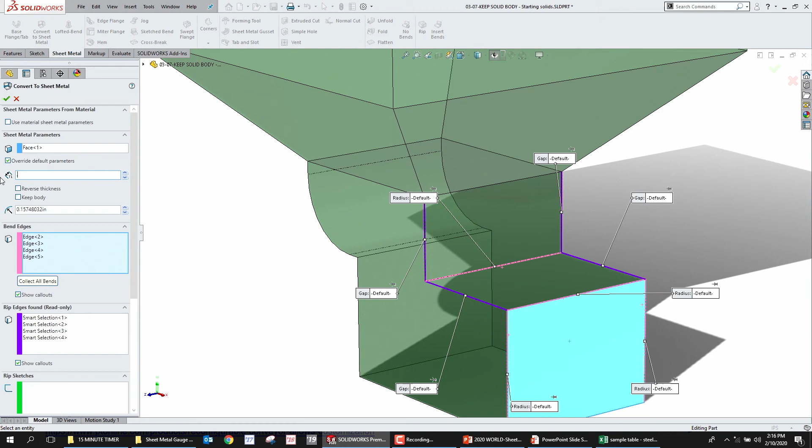We're going to do this guy and this guy. My bend radius was too small, and I was getting a problem with the gapping. So we go to the green check mark here, and you can see we discarded the solid body, which just leaves us with this sheet metal single body. But this time, I'm going to edit that feature and say keep that original solid body. So now I've got a sheet metal body right on top of my solid body.

So now I'm going to perform convert to sheet metal again and say I want to use this face as my foundation, this edge to be bent, this edge to be bent, and I'm going to pick this face here to also be part of this bend process.

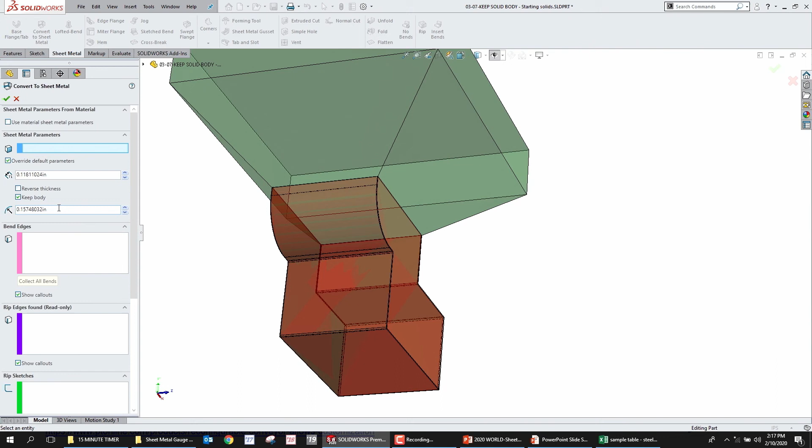If you've worked with multi-body before, you know we could take all of those views and put them onto the same drawing. We could even create an exploded view of the multi-body and create a bill of materials from that design. So convert to sheet metal is awesome - I think it's probably the coolest of the three. You start with a solid, then go to the sheet metal conversion process. When you're done, you can create additional features like edge flange, miter flange, hem, all those cool features. It's great for complex angled parts, great for multi-body design, and can be used for imports even with non-uniform wall thickness. Just like all our examples today, the flat pattern length will be a little different from the formed length.

Pretty cool. Any questions? Question?

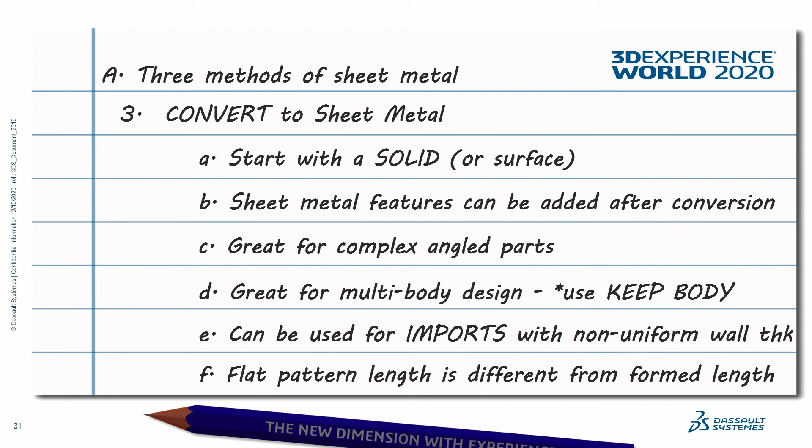Okay, we're going to move on to the next section, talking about flat patterns in sheet metal. When it comes to flat patterns, there are some important things to know and options to look at, but the most important thing is how do you make a flat pattern configuration in sheet metal. So how do we get to this point? Does anybody want to guess, or does anybody know how you make this configuration?

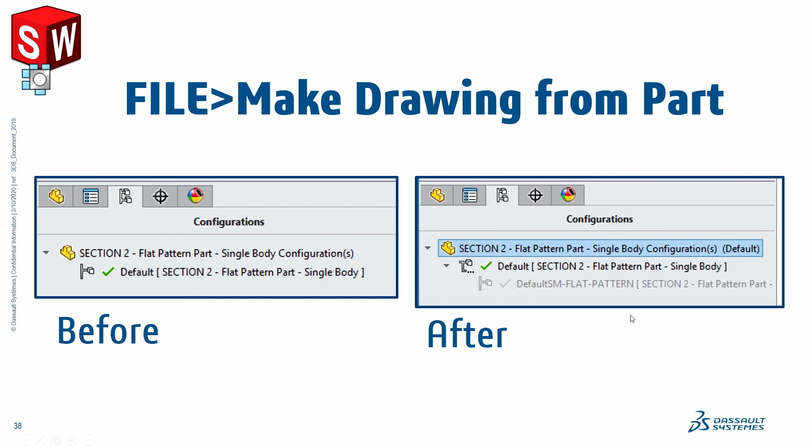If you know, just hold off a second - don't answer right away. Okay, now you can answer if you know. How do you get to this point? What's the answer? Start a drawing. That's the right answer, believe it or not. You start a drawing. When you go to create a new drawing in SolidWorks, this new configuration will be automatically created. It's a derived configuration with a very specific naming convention. If you don't match that naming convention, you won't get all the cool functionality you can get from sheet metal.

So if I have this part here with one single configuration, and I go to File, Make Drawing from Part, we can see that as soon as I start a new drawing and select a sheet format, it generates this drawing preview pane over here on the right, and one of those previews has the geometry in a different state. For the geometry to be in a different state, a new configuration had to be created. So even if I begin a drawing and immediately cancel it, this new configuration has already been created.

A lot of times when I want to make a flat pattern, I'll just make a new drawing and then insta-cancel it, just because I don't want to go through the process of making a derived configuration and naming it default SM flat pattern. So that's the answer to how do I make a sheet metal flat pattern configuration. Just kick off a new drawing and let the software make it for you. It will name it correctly based on whatever the currently active configuration is.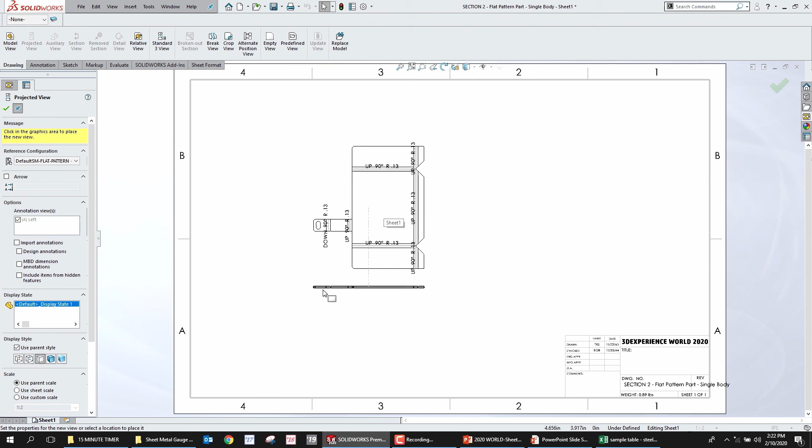Now if we go into drawing mode, so if I go File, Make Drawing from Part, and then go to the flat pattern configuration, it looks really good. A lot of times what I'll do when making a drawing of a sheet metal part is start out on the first sheet, go through it, add in our appropriate views, set our scale appropriately, and then add a second sheet.

A little trick I like to use on the second sheet is I delete the sheet format from the tree. So you go to the second sheet, and since you're exporting this to the Amada or whatever you're cutting it with, the laser cutter or water jet, I'll right mouse button in the tree and delete the sheet format so the second sheet is totally blank. That's where I'll add my flat pattern view. Pretty cool, right? You guys knew about that? Yeah, some of you, yeah.

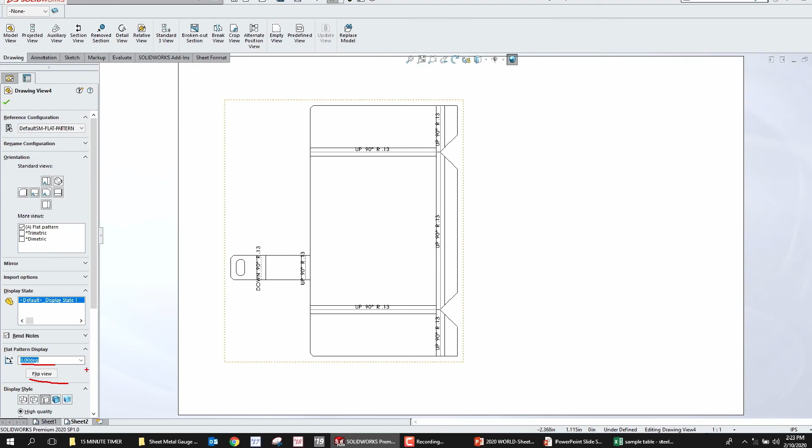I can click on this view and there's a section dedicated to flat pattern display where I can change the rotation, even pick it up and flip it on the drawing. Maybe I'll change this to 90 degrees so you can see what it looks like. If the burrs are going the wrong way, if you're doing a punching operation, you're going to get burrs on the edges where you punch through. If you want them to go the other way, you could pick up the whole thing and flip it over, then send it to the machine in that orientation. You can do that using this flip view thing here.

But check this out. I'm going to go back into my original model and say add configuration, and I'll call this Toby flat. I'll go to my feature tree and suppress or unsuppress the flat pattern. That looks beautiful. I got myself a really nice flat pattern there, right?

Now I'm going to insert a model view of that model in the top view. Okay, that looks pretty good. And it's oriented the wrong way, right? So I'm going to click on the view and come over here to where it says flat pattern and change the angle. Wait, this one, flat pattern display. This one, no flat pattern display.

So the drawing actually doesn't recognize this as a flat pattern because it's not a derived configuration named the correct way. This is just another example of where you may miss out on some sheet metal functionality, and if you want to avoid that, just let the software create the configuration for you. Cool? Okay, cool. Let's talk about a couple more things.

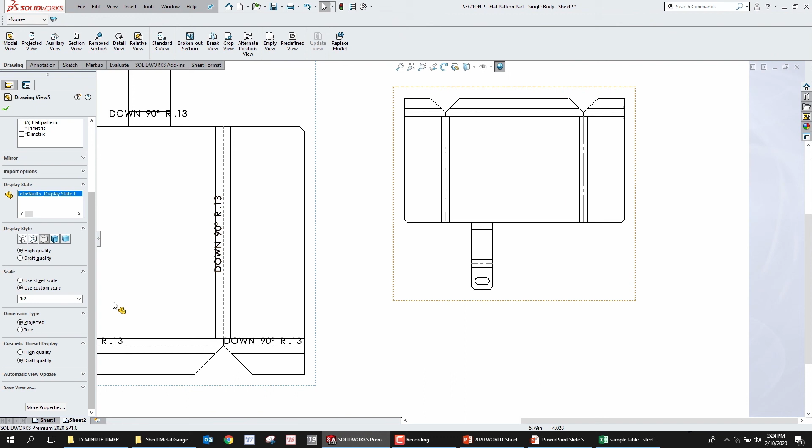Let's talk about these corners. What do we think about these corners? Do these look good? Maybe not, right? What should they look like? What do you guys think? In the form view, it looks like this. In the flat view, it looks like this. What's going on there?

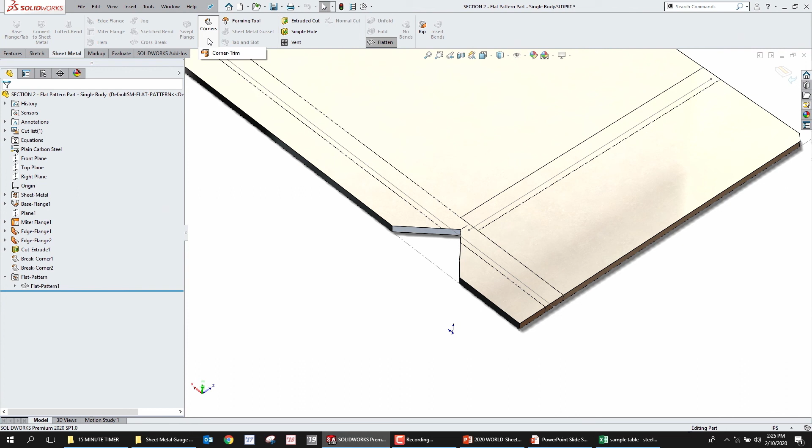What's happening here is that when you have a sheet metal design, you're going to have a section at the bottom of the tree called flat pattern, a feature called flat pattern. When we go to that feature and say edit feature, there are some options, and one of those is called corner treatment. This is a bit of a legacy option. It's basically saying that after you create the flat, you'll come in here and punch in some features, maybe just using a straight punch or a hole type command. That's going to create some clearance for your bends, some relief for your bends. It's going to make it easier to do the bending process.

But I don't personally like this because it's not the same as what you're going to ultimately get in the formed view. Right now, my formed view looks one way and my flattened view looks a different way. The customer might be expecting to get this and then end up getting something that has these holes punched in it.

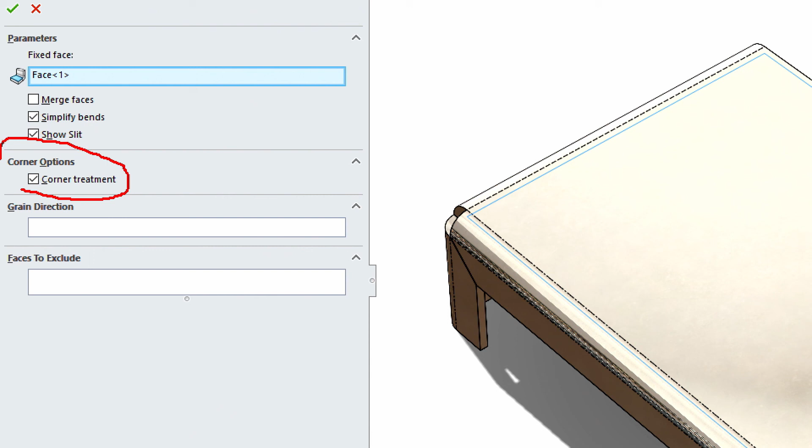So instead, I would go about this a different way. What I really want is I don't want to use the option for corner treatment. I want whatever's in the form view to look like the flat view. So I'm going to say edit feature, and uncheck this option for corner treatment.

This is one of the most common things people ask me about in sheet metal and in tech support, so it's a good one to look out for. You edit the flat pattern and uncheck that option for corner treatment, and you're going to get the behavior and geometry you're expecting. There's a couple other options in there that are good to know about. Probably the other big one would be merge faces. Really straightforward—merge faces, and the whole thing ends up being one single face. Your machining software might prefer this. If you don't have merge faces turned on, then when you go into the flat pattern, each bent face is going to kind of retain its face ID.

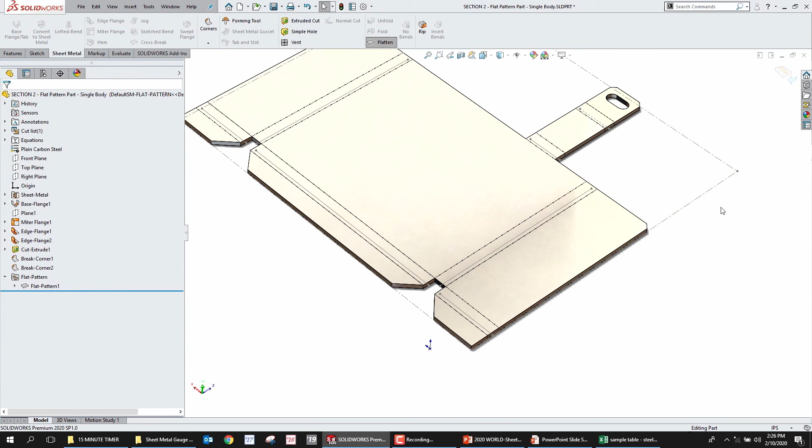Makes sense, right? Pretty straightforward. The other ones in there are for a little bit more nuanced, more fringe cases, so we don't have to get too into them right now. So just a little bit there about the flat pattern options. To edit those options, you go to the bottom of the tree, right mouse button on flat pattern, and choose edit feature.

We also got to have a quick discussion about display states. The difference between display states and configurations can be summed up very simply: configurations are a change to geometry, display states are a change to appearance. If you've got an assembly, you could have one version where two of the parts are hidden and another version where they're shown. Does that need to be a new configuration? Does that need to be taking up additional resources on your machine, both in hard storage and in RAM, having multiple configurations? No, it could just be a display state.

So display states were created to help with that challenge of: look, all I want to do is hide a couple of these parts or change the way some of these parts are colored. I don't want to have to make a whole new configuration just for that. But when it comes to sheet metal and part management in general, it's pretty common that you can end up doing what's called a linked display state.

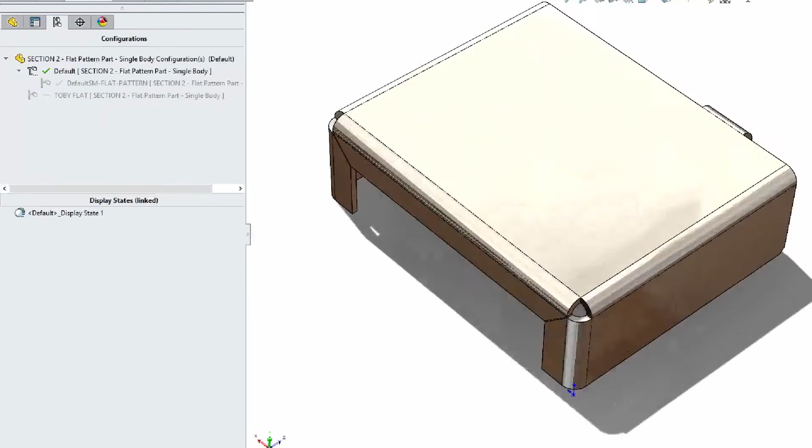So here in the properties of a display state, you could say I want to link my display state to the configuration, which means the flat pattern has a display state called flat, and the default has a display state called default.

And so if we are working in SolidWorks and we are examining our flat pattern, and we decide, hey, I want this to be a little bit of a different color—just a slightly different color, maybe make it a little bit more... okay, oh yeah, that looks great, that's going to look great for everything. Then you go back to your form view, and in your form view it ends up looking a little different.

Sorry, I didn't change configurations—what am I doing, I'm going nuts. Here we go, it's linked to the configuration. There we go. Has anybody ever run into this? I know this is a pretty common thing. Okay, I see a couple hands. Yeah, so this is what's happening.

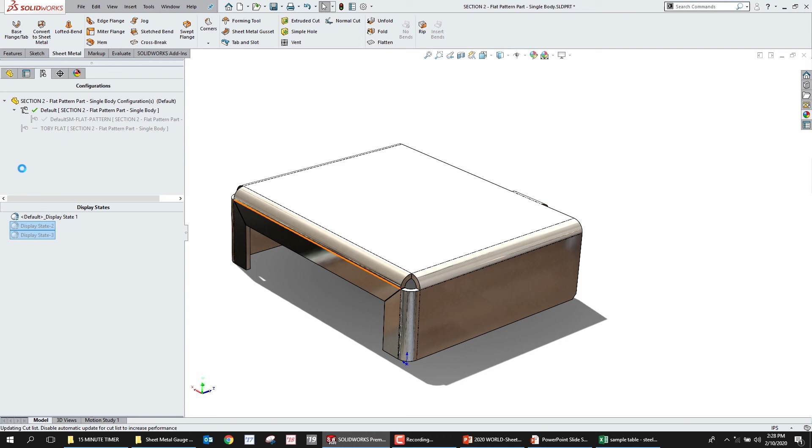And the way you resolve this is you just get down into your display states and say properties: one single display state. Don't link the display states. I just want one—one ring to rule them all, right? One to bind them. So we'll get rid of these other display states. And now, as we click around, we always stay in that one single display state. You're not going to get that different appearance for the different configurations, because it's linked.

All right, and then the final thing I want to tell you about with regards to multi-body sheet metal is that in general, when you're working in SolidWorks, you've got the ability to have a multi-body design and to select just one body from that multi-body design to bring into a drawing. So for example, I'll use this weldment, which is a really common example of multi-body, just mixing it up a little because we've been doing sheet metal for so long.

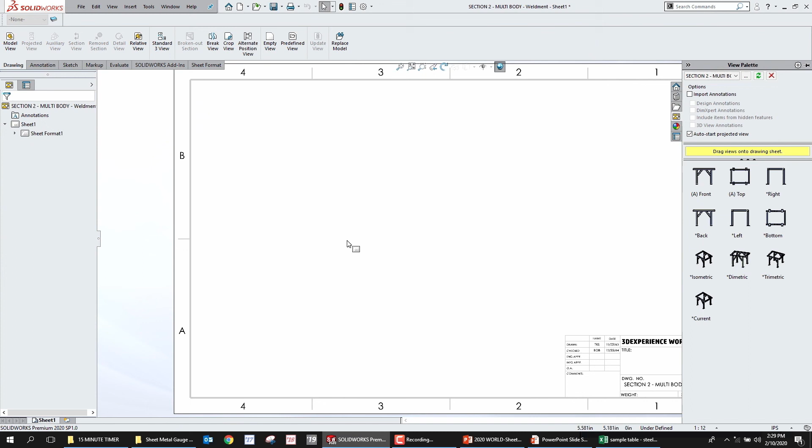If I use this weldment as an example, and I bring in the weldment in its isometric view, maybe I want to create a weldment table, so I'll go here to Tables, Weldment Table, and then I'm going to create an auto balloon. I'm going to auto balloon this thing so that we've got all of our balloons for this.

We can do this exact same thing with sheet metal. I'm just mixing it up a little bit here. What I can do is go to Drawing Model View, select the name of that part, and then in this second window for Model View, choose Select Bodies. Once I choose Select Bodies, the part model opens, and I can pick one or more bodies to create an explicit view of just that body.

So now I can get in here and tell the manufacturing team that this needs to be cut at an unusual angle.

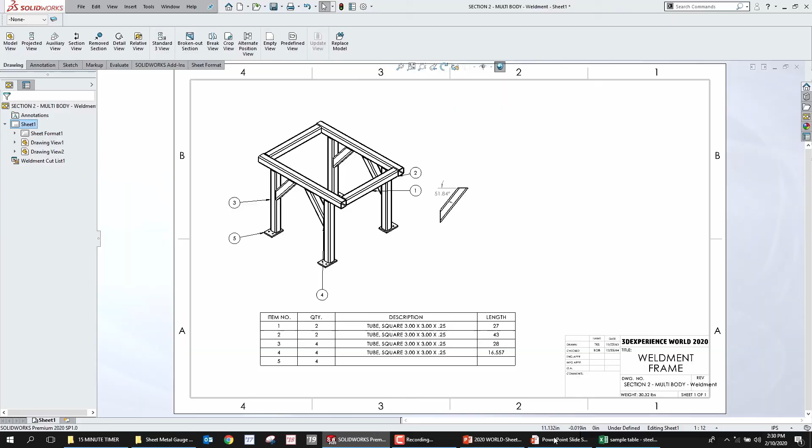Pretty cool, right? This is the same way you would do it with sheet metal. You would create a drawing, and say I want to create a model view. I'm going to select this one single body, and then when you bring in that model view, you'll see there'll be an option for flat pattern for that model view.

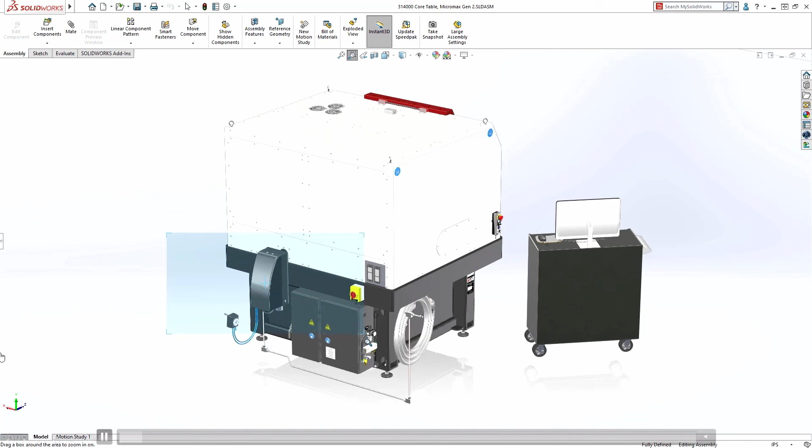So I think everybody agrees that sheet metal is a pretty powerful and cost-effective design technique, right? And for a long time, we've had really powerful tools, like pulling an edge flange off of a fairly complex base flange like this. Just select along the tangent edges, and I can pull that out. Pretty simple, right? We've also used multi-body techniques.

We've talked about swept flange. We have all of this amazing functionality to do pretty complex sheet metal designs, but what we've never been able to do is pull an edge flange off of a tangent set of curved edges that are in 3D. So coming soon in SolidWorks, you'll be able to create an edge flange off the tangent edges of non-planar edge flanges or base flanges.

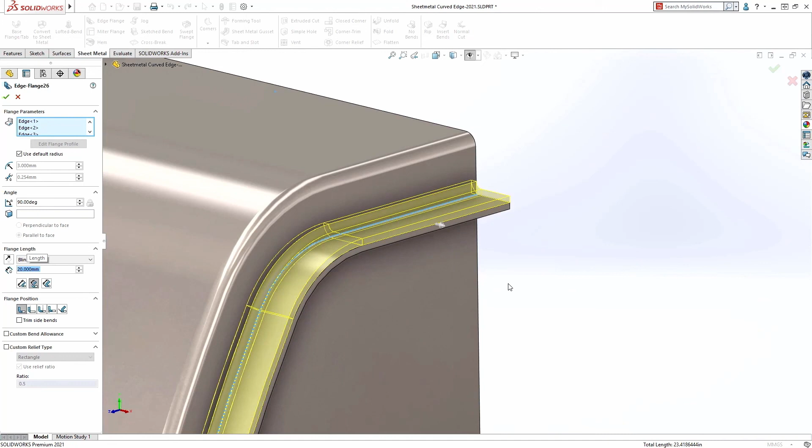Whoa, so what you're seeing here is exactly that. I can pull those off of a swept flange or a base flange. I can pull them off of an existing edge flange like you see here. And again, this is a multi-body approach to get that type of a result. Now, obviously, it's a pretty complex sheet metal flat pattern.

What do you think? The command wouldn't be complete, Toby, if we couldn't flatten the design, right? Of course, right there it is. Just like Toby showed you earlier, I hit flatten, and there's the flat pattern of my design. Everything done. So this is coming soon.